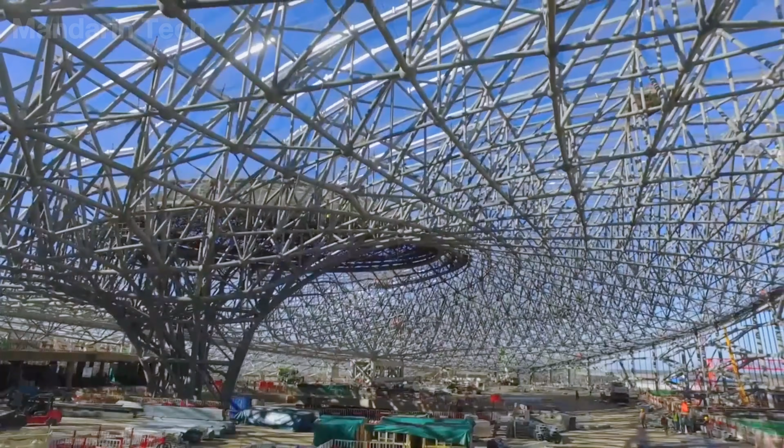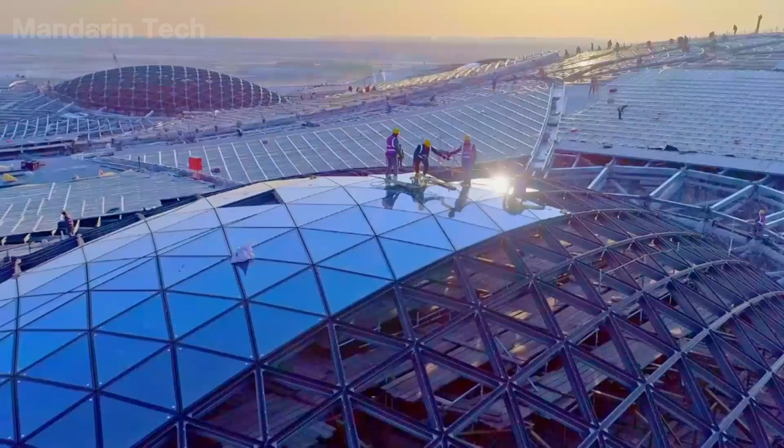Building big is difficult, but building something that is fast, massive, precise, and able to operate reliably for decades is the real challenge. In today's video, join Mandarin Tech as we dive deep into the bold ideas behind Beijing Daxing and how it is reshaping global aviation.

The emergence of Beijing Daxing International Airport was not merely an ambitious choice, but an inevitable consequence of infrastructure pressure in China's capital. For many years, Beijing Capital International Airport, the nation's primary aviation gateway, had been operating well beyond its design capacity. Despite being expanded at a cost of billions of US dollars ahead of the Summer Olympics, the airport once again reached its capacity ceiling after only a few years.

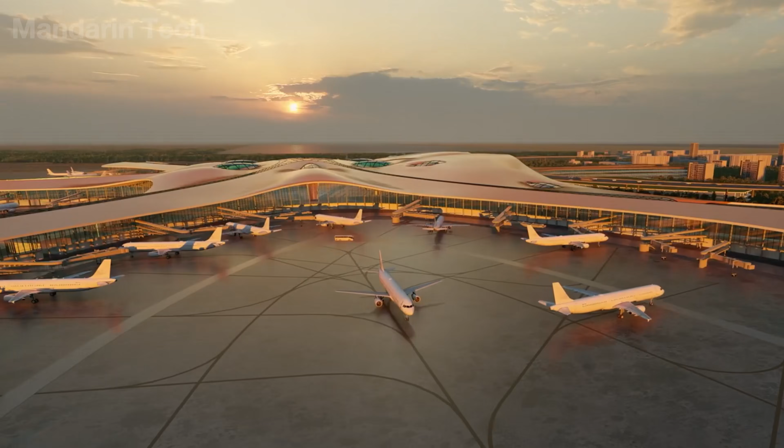When annual passenger traffic surpassed the 100 million mark, Beijing faced a critical dilemma. Without the construction of a new aviation hub, this congestion would constrain economic growth, disrupt national transportation networks, and directly undermine the political role of the capital. In this context, Daxing was planned as a strategic pressure release valve, not only to relieve the existing airport, but also to ensure that Beijing could continue to function smoothly for decades to come.

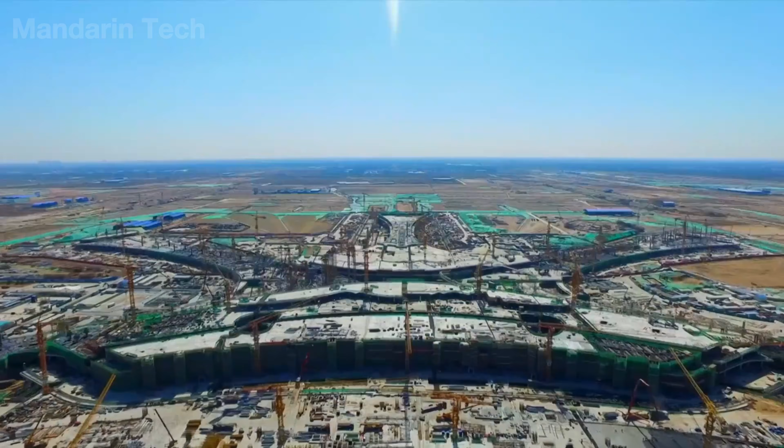To bring this goal to life, Chinese architects and engineers, together with international teams, went through a design process that lasted many years, during which more than 200,000 technical drawings were drafted and refined. The subsequent construction phase then proceeded continuously for 54 months, mobilizing hundreds of thousands of workers and transforming an empty site into one of the largest aviation hubs ever built.

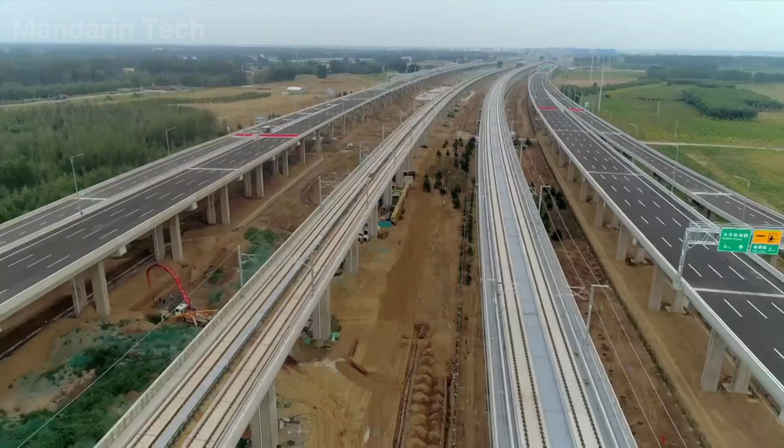Located approximately 46 kilometers south of central Beijing, in an area bordering Hebei province, Beijing Daxing International Airport was planned from the outset according to the standards and structural logic of a new generation airport. The entire airport covers an area of more than 45 square kilometers, large enough to integrate runways, terminal buildings, technical zones, logistics facilities, and safety buffer areas within a single unified site. The central terminal has a total floor area of approximately 700,000 square meters, organized as a continuous space rather than separated blocks, in order to minimize internal walking distances.

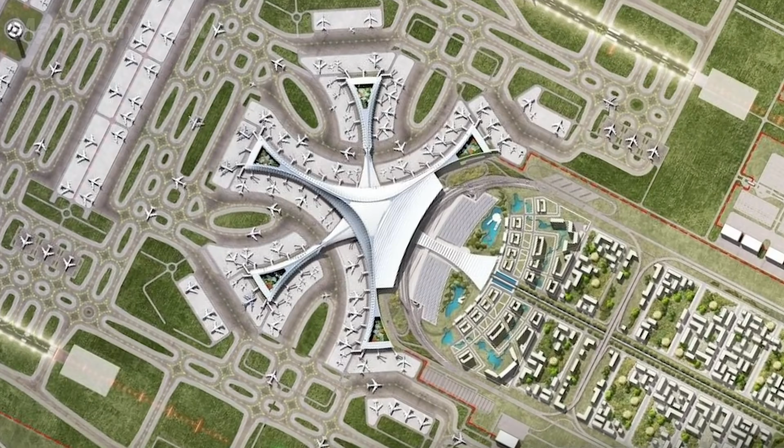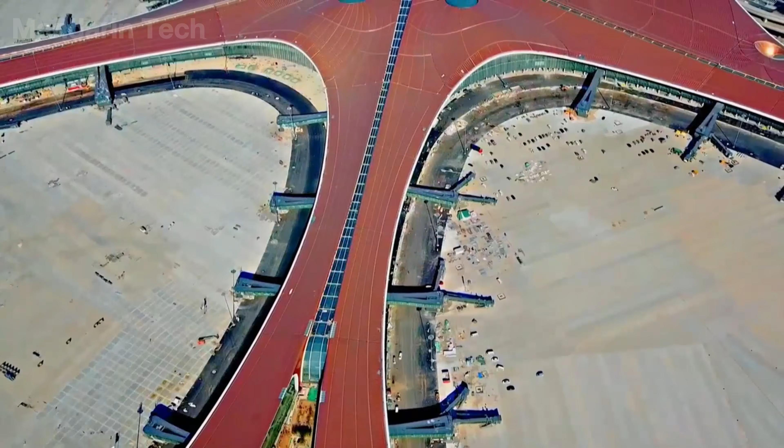At full operational capacity, the airport is configured with 6 parallel runways, enabling the simultaneous handling of multiple takeoff and landing flows at high density. These figures reflect not only sheer scale, but also demonstrate how China approaches an airport as a complete infrastructure ecosystem, rather than as a standalone transportation facility.

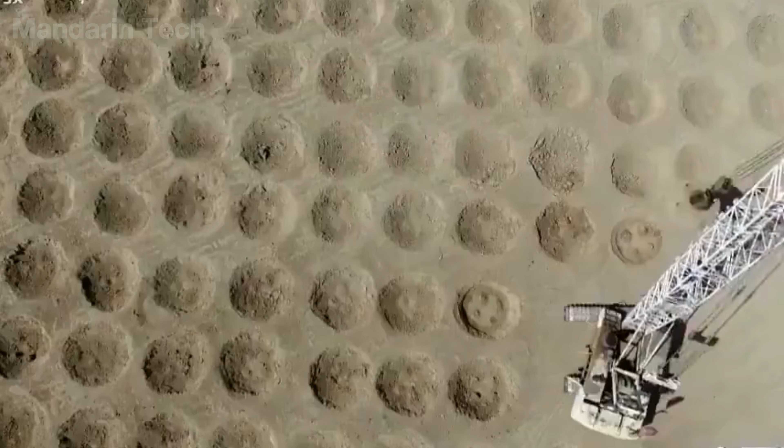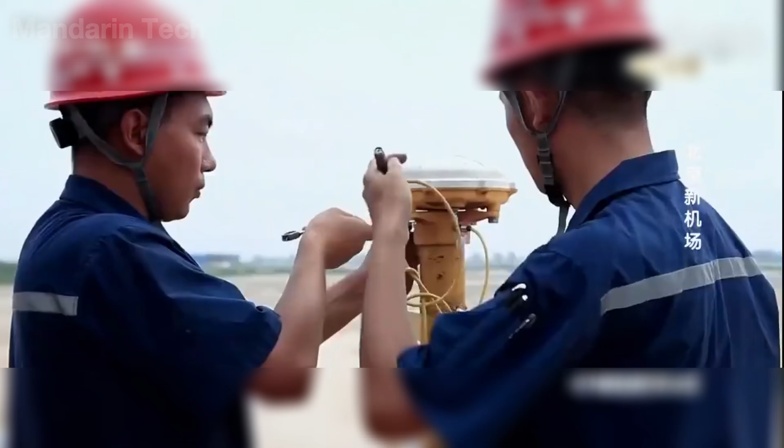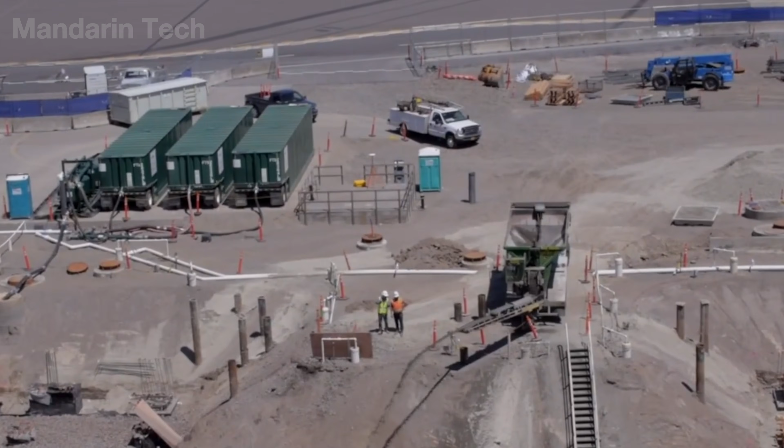Foundation construction is a quiet yet decisive phase of the entire project. Across a site spanning dozens of square kilometers, the construction area was divided into multiple zones to allow parallel operations, ranging from weak soil treatment to elevation leveling. Heavy machinery operated continuously, combined with GPS surveying technology and sensors to precisely control each foundation layer. The site was subdivided into numerous control points to monitor settlement and compaction in real time.

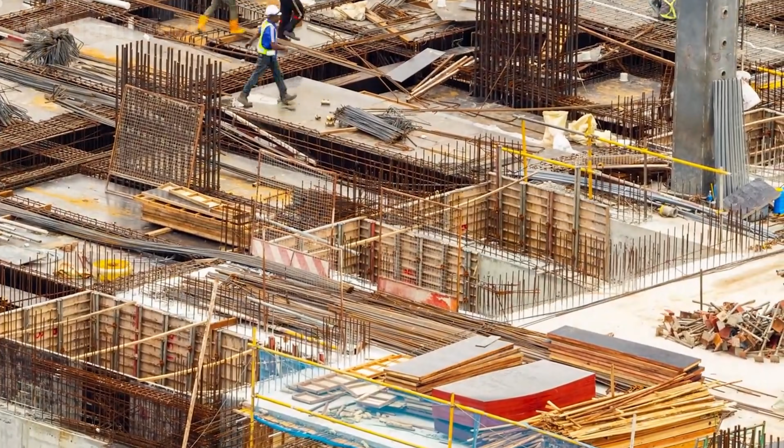At peak periods, tens of thousands of workers were engaged simultaneously, gradually completing the project's technical foundation. It was this rigorous control from the foundation stage that ensured the entire superstructure above could be executed in a stable, coordinated, and durable manner throughout its operational lifespan.

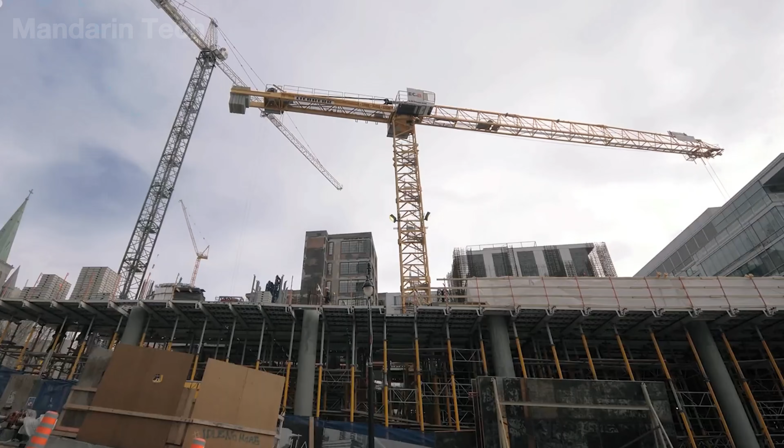Beyond its sheer scale, Beijing Daxing Airport is also shaped by a design philosophy intended to leave a strong first impression, while at the same time solving the challenge of moving tens to hundreds of millions of passengers smoothly each year. To address this problem, Chinese architects and engineers turned to a classic precedent in the history of urban transportation, Grand Central Terminal in New York.

More than a century ago, this station handled hundreds of thousands of people every day, not through dense signage or forced control, but through intelligent spatial organization. A vast central hall, unobstructed sightlines, ramps instead of stairs, and clearly layered circulation flows. As a result, people could intuitively find their way without complex guidance.

Beijing Daxing does not replicate the form of Grand Central, but inherits this core idea and applies it to an aviation-scale context. Instead of lining up dozens of departure gates along long corridors, the terminal is organized around a central core from which 5 finger-like concourses extend outward. This layout shortens the distance from the center to the farthest gate to about 600 meters, creating a continuous, orderly, and efficient flow of movement for millions of passengers each year.

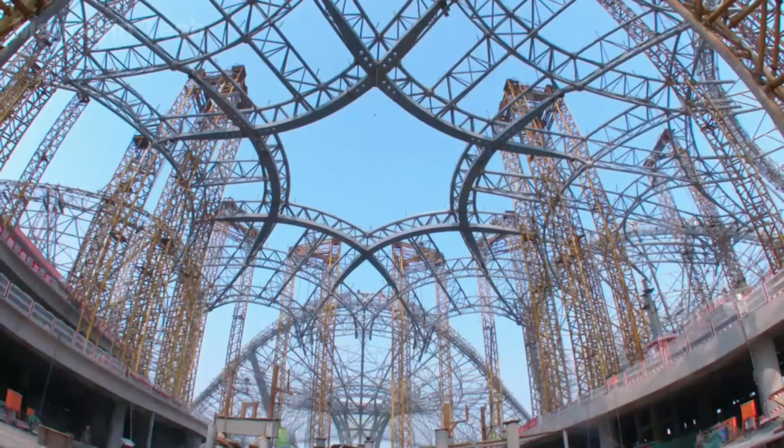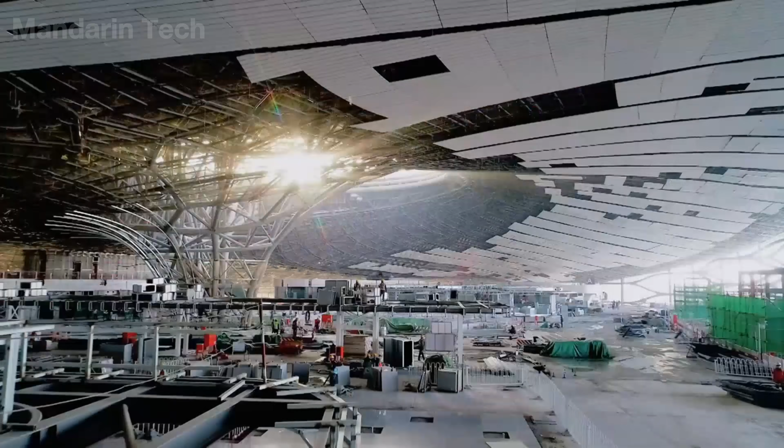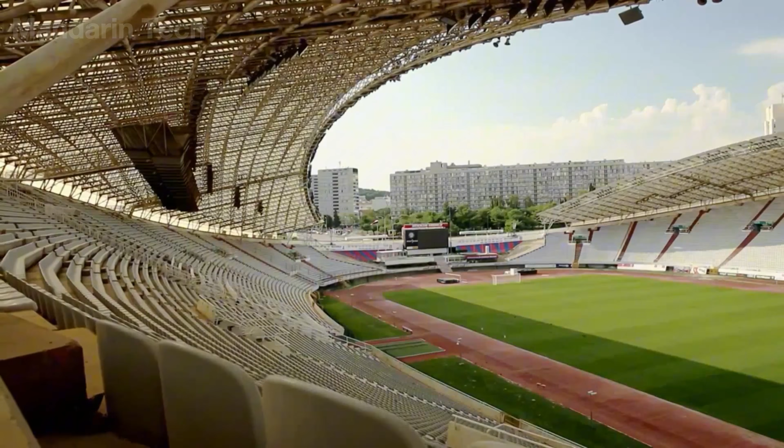The next challenge was to cover an enormous space while maintaining visual and spatial continuity. The ambition to create a vast roof without supporting columns forced the engineers of Beijing Daxing to seek solutions beyond conventional structural systems. Instead of starting with entirely new technologies, they looked to Poljud Stadium, a structure built in 1979, where a three-dimensional space frame had been used to cover the entire grandstand without obstructing sightlines.

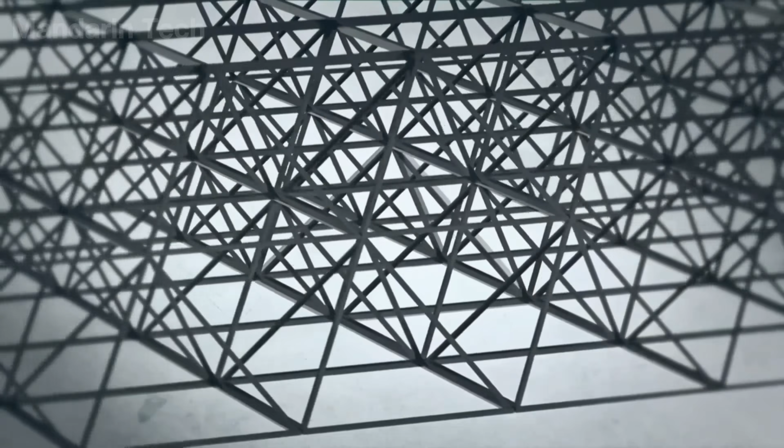Steel members were connected into triangular modules, allowing loads to be distributed in multiple directions, increasing structural stability while reducing material use. This principle became the conceptual foundation for the roof design of Beijing Daxing.

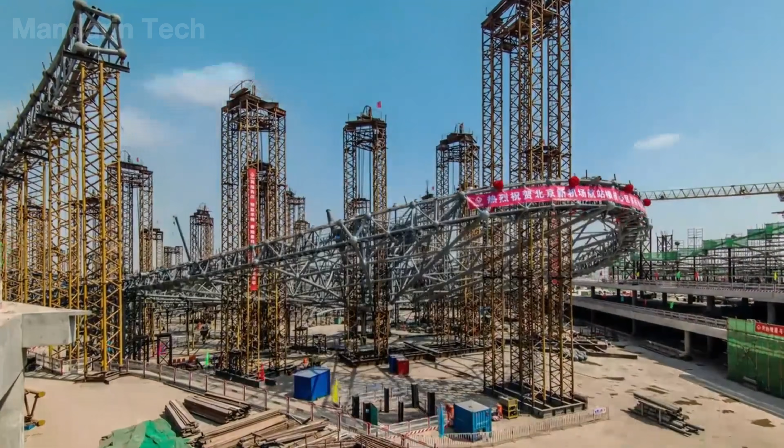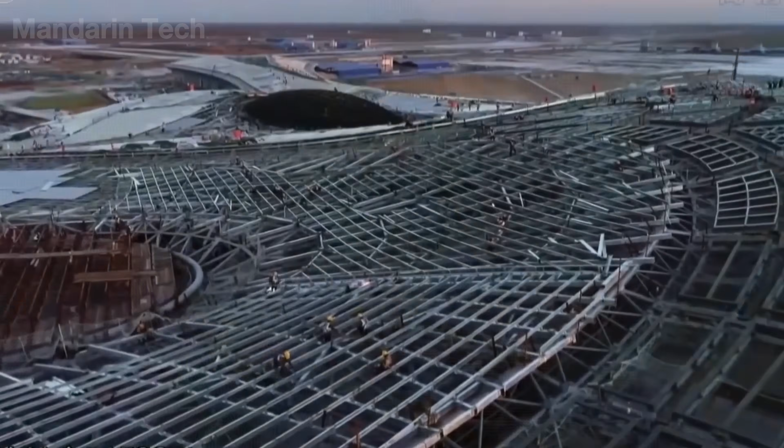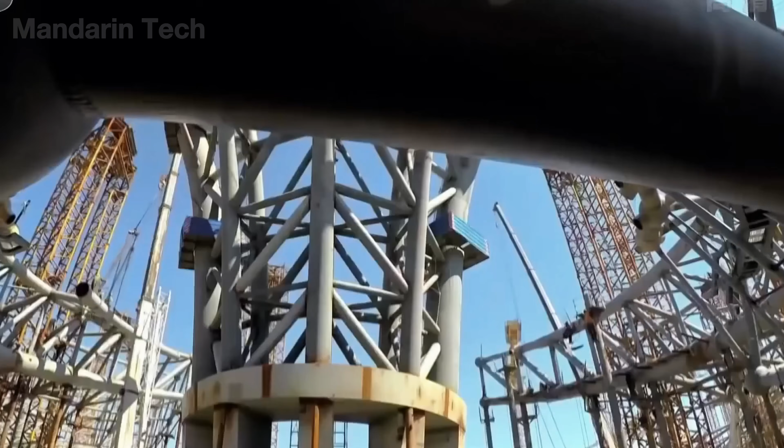Turning Daxing's massive space frame roof into reality presented a construction challenge on an unprecedented scale. Rather than assembling the entire roof at height, a method involving significant risk and difficult-to-control tolerances, the engineers adopted a segmented construction strategy. First, 8 primary load-bearing columns, which together form the entire support system of the roof, were erected with absolute precision. These columns serve as the only anchoring points carrying the full load of the steel roof above.

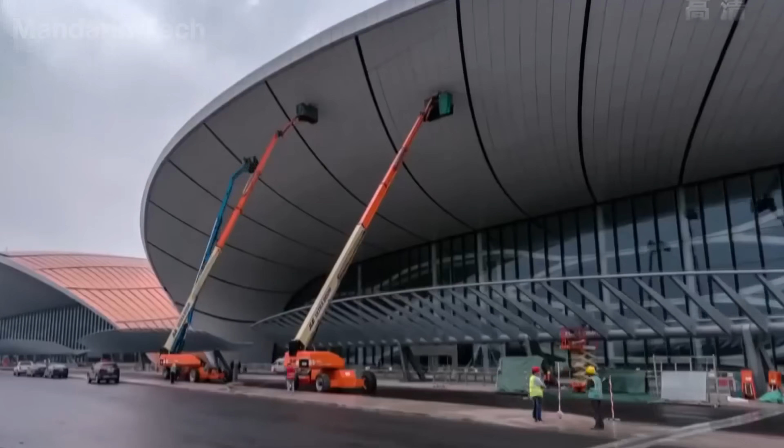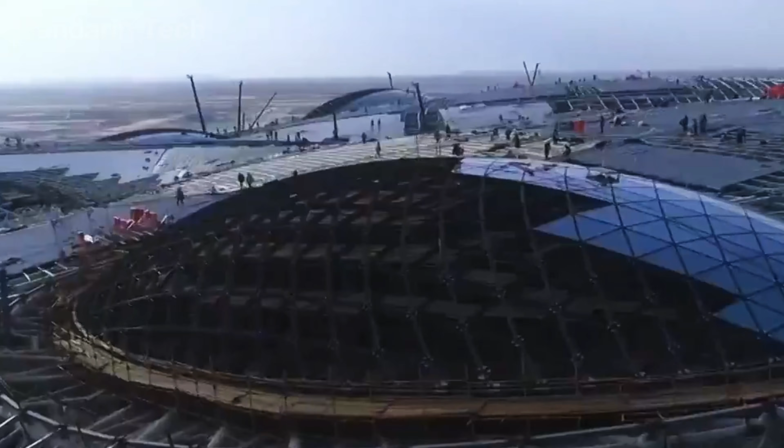Instead of assembling the entire roof structure at height, the construction process was carried out progressively from the ground upward under strict control. Roof components and cladding panels were prefabricated on the ground, then lifted into place using aerial work platforms, cranes, and specialized equipment. At elevation, workers operated directly along the roof edges to align and secure each metal and curved glass panel according to the precise geometry of the design. Installation proceeded sequentially in strips, ensuring accuracy while significantly reducing safety risks.

When completed, the roof, weighing more than 57,000 tons, resembles a floating steel forest suspended above the terminal. Beneath it lies an acoustic ceiling for noise reduction, while above are more than 8,000 daylighting glass panels and 40,000 aluminum cladding panels forming the exterior surface. Just 111 days before operations began, the entire roof envelope was fully installed, marking one of the most impressive construction milestones of the project.

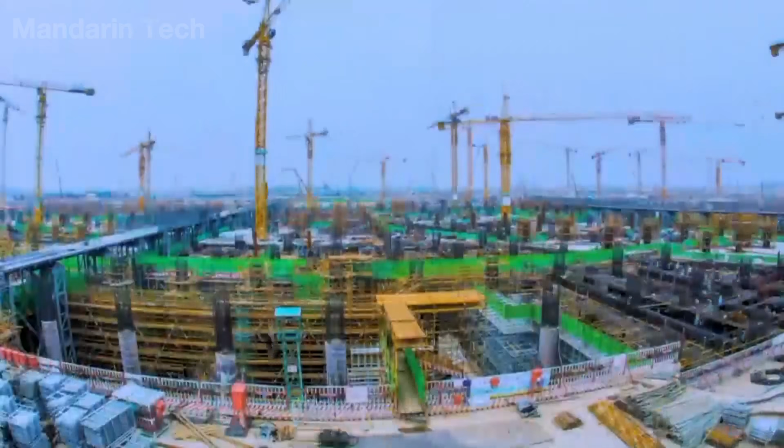Although the planning process lasted many years, Beijing Daxing International Airport was completed in a record time of 4 years and 9 months. Before its opening, the airport entered a large-scale operational trial phase with more than 51,000 volunteers simulating real passenger flows. The results showed that travel time from the central hub to the farthest gate was under 8 minutes, exceeding initial expectations. In parallel, the technical systems were comprehensively reviewed. 7,100 intelligent LED lights were tested. Emergency scenarios were rigorously rehearsed, and nearly 20 kilometers of underground technical tunnels were put into trial operation to ensure stable infrastructure before the airport officially opened.

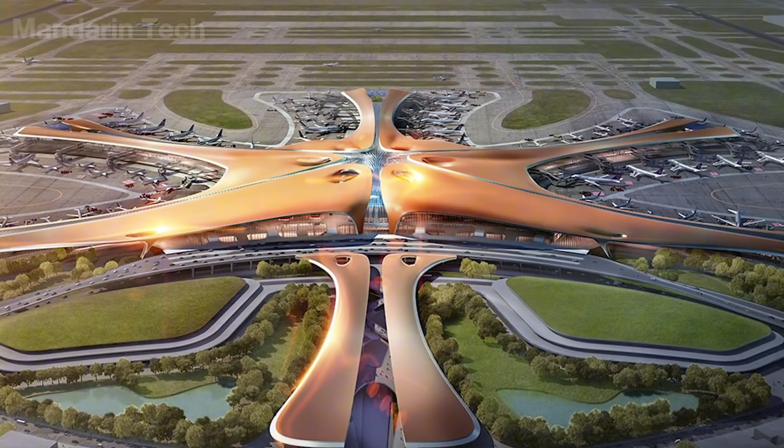Daxing goes far beyond the role of a conventional airport. The project demonstrates that limits once considered impossible in construction can be overcome through technology, organization, and determination. At the same time, it has become a powerful engine of economic development for the entire Beijing-Tianjin-Hebei corridor. The image of Daxing's massive starfish-shaped terminal has spread across international media, telling a story of modernity, innovation, and exceptional capability.

On a global scale, Daxing helps reshape the map of international aviation hubs. As China stands as one of the world's largest centers of production and consumption, a mega airport capable of stable operation at an extremely large scale has a direct impact on global supply chains. The airport thus functions as both an economic and strategic instrument, influencing trade, high-speed logistics, and China's position in global connectivity in the 21st century.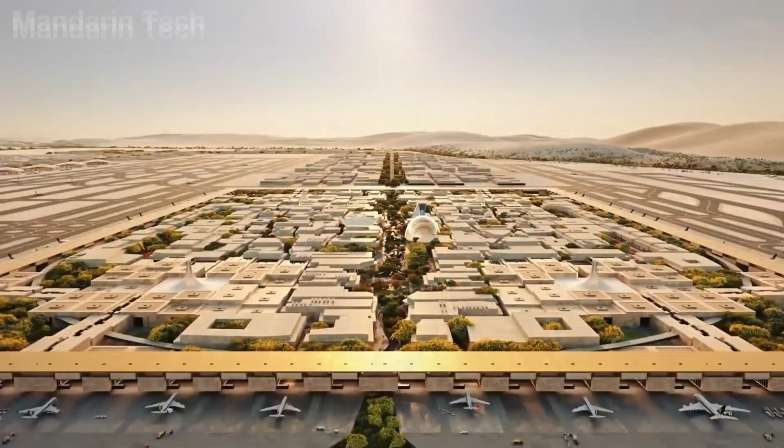From the strategic role of Daxing in reshaping the global aviation network, the next infrastructure story takes us to the Middle East, where King Fahd Airport was built in a very different context, yet reflects an equally ambitious vision of scale and connectivity. King Fahd International Airport is considered one of the most exceptional aviation infrastructure complexes in the world, not because of traffic density, but because of its unprecedented scale and planning mindset.

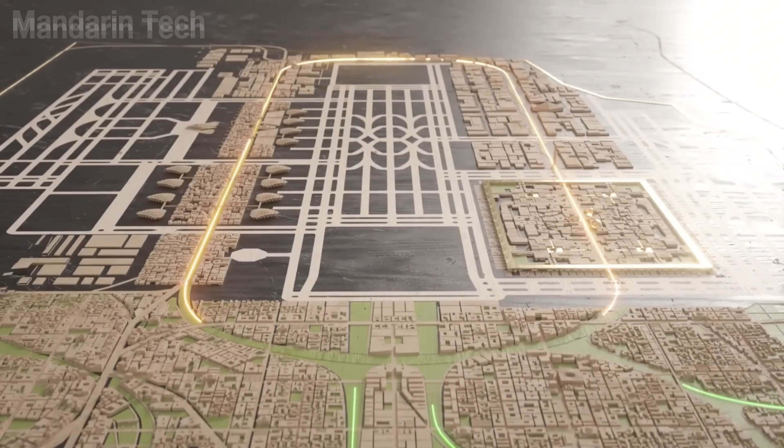With an area of more than 776 square kilometers, larger than many mid-sized cities, King Fahd was designed as an aviation mega-campus in the middle of the Dammam Desert, where every zone, from the passenger terminal, cargo area, and maintenance center, to the dedicated aviation facilities of Saudi Aramco Aviation, operates as an independent unit, yet remains tightly interconnected.

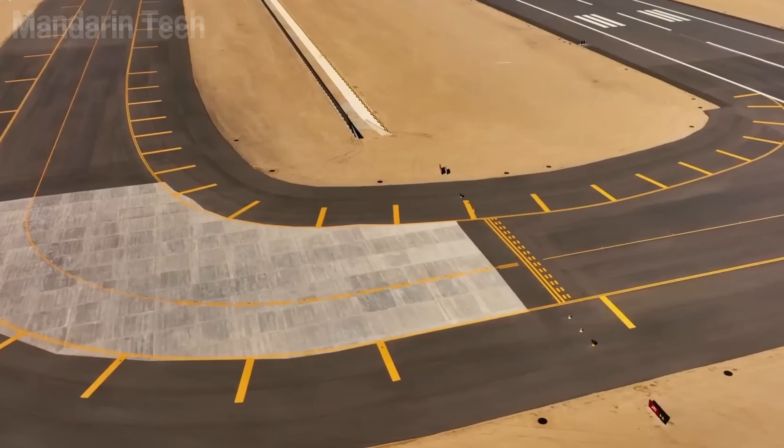Two parallel runways, each more than 13,100 feet long, enable stable handling of long-haul flights, while the expansive taxiway system minimizes intersections and enhances operational safety.

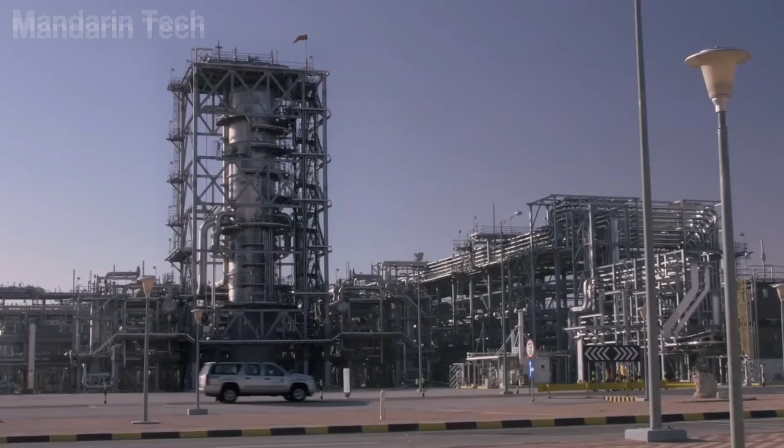From a strategic perspective, King Fahd is a clear testament to Saudi Arabia's effort to shift its economy away from dependence on oil, moving toward a model based on aviation, logistics, and commercial services. The project is positioned as a key piece of infrastructure for the entire Eastern Arabia region, connecting Dammam, Al-Khobar, Dhahran with the rest of the region and the world.

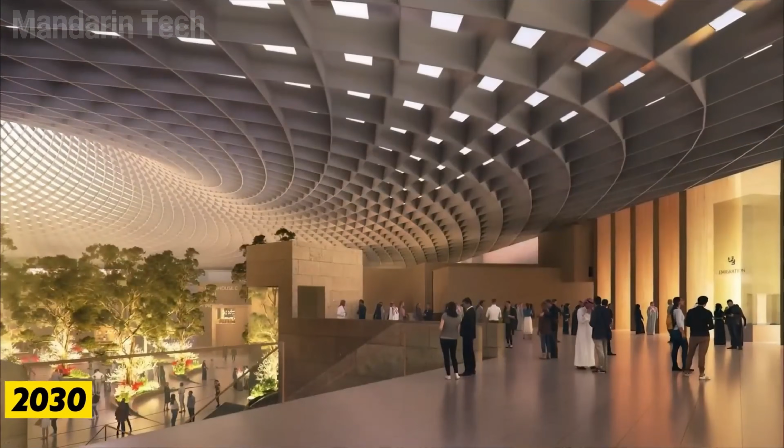Thanks to its strategic location and massive land area, King Fahd is viewed as a core infrastructure asset that helps Eastern Saudi Arabia maintain its development momentum, while strengthening the country's position as an increasingly important logistics hub in the region.

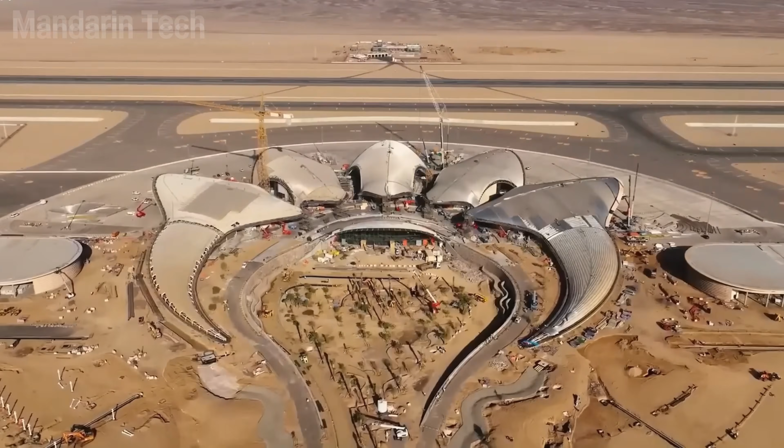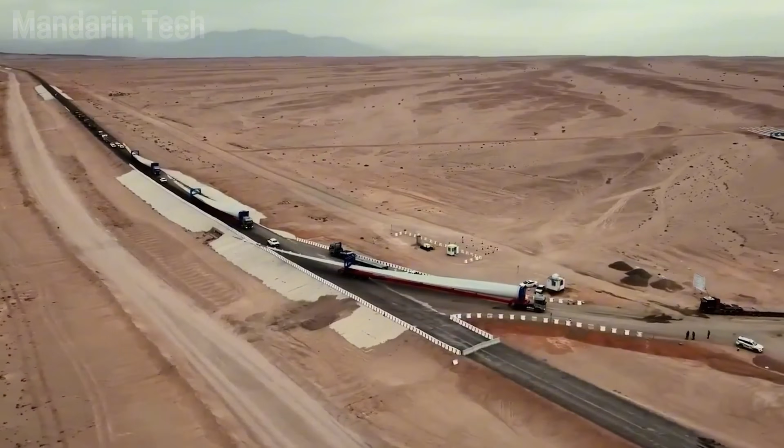The idea of building a large-scale airport in Eastern Saudi Arabia emerged in the late 1970s when air transport demand was rising across the Dammam-Dhahran area. The government chose a vast desert region northwest of Dammam, about 35 kilometers from the city center, because it offered enough land to develop an aviation infrastructure complex for decades to come. The total planned site area reached 776 square kilometers, making King Fahd the airport with the largest land area in the world.

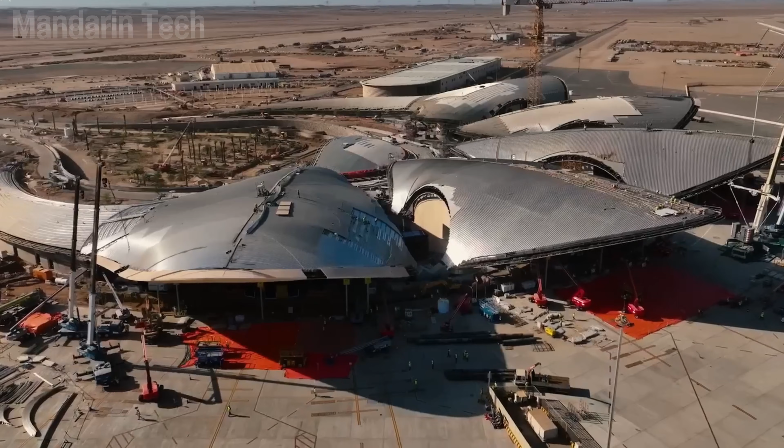In the 1980s, construction teams began leveling the desert to create the foundation for the terminal, runways, and taxiways. The work focused on reshaping the terrain by flattening natural landforms and large sand dunes and reinforcing the surface to support the loads of a modern airport. Because this was a desert region, the biggest challenge was controlling drifting sand and ensuring ground stability before placing structural systems. All activities complied with the standards of the Saudi Arabian General Authority of Civil Aviation, GACA, and the United Nations International Civil Aviation Organization, ICAO, for airport foundations in hot and dry environments.

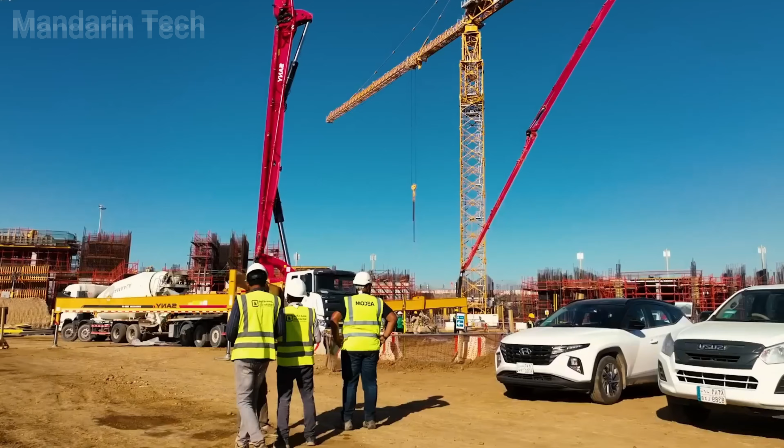King Fahd was designed with two runways, each about 13,100 feet long, enough for wide-body aircraft to take off and land. The construction team laid the base layer of the runway and then covered it with a specialized asphalt concrete capable of withstanding temperatures of more than 120 degrees Fahrenheit in eastern Saudi Arabia. The two runways were built in parallel, allowing the airport to handle multiple flights at the same time and accommodate long-haul aircraft.

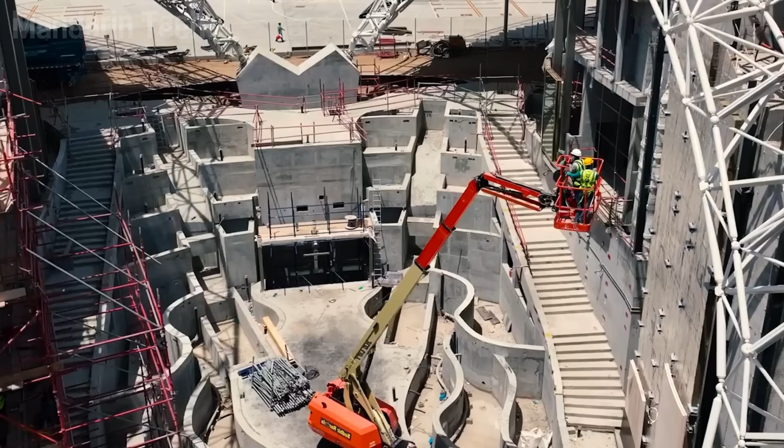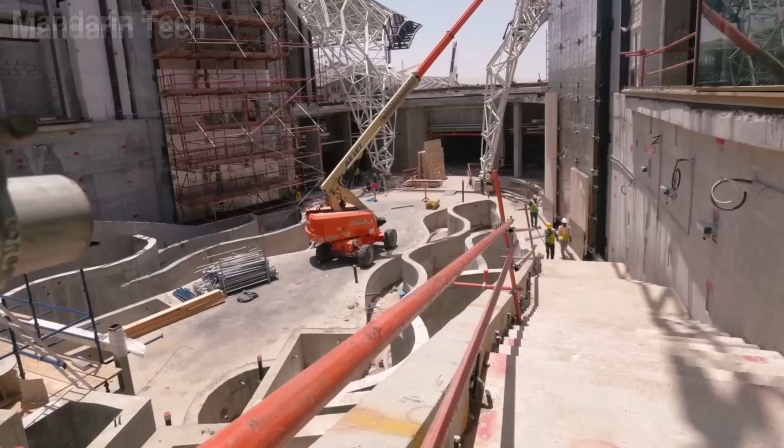From the late 1980s to the early 1990s, the terminal was built with the distinctive architecture of the Gulf region. The project included spacious halls, check-in areas, arrival and departure corridors, and technical facilities. At the same time, the air traffic control tower was constructed to oversee all flight movements across the airport's vast area. Supporting facilities such as the Royal Terminal and a dedicated terminal for Saudi Aramco Aviation were also built according to specialized operational standards.

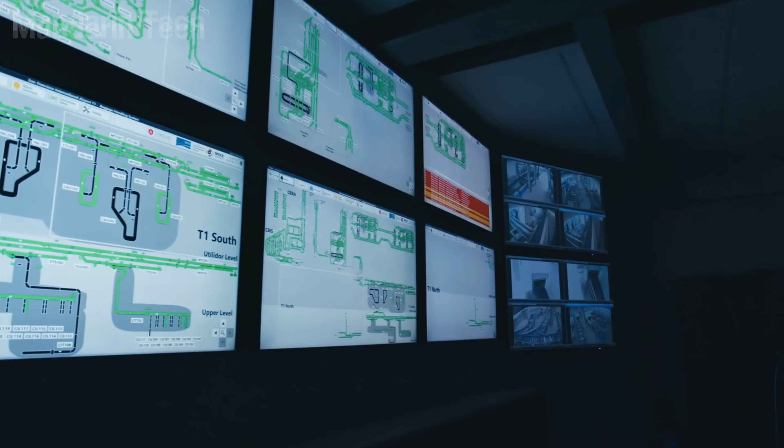Once the main structures were in place, the electrical system, runway lighting, large-capacity air conditioning, ventilation, water supply, drainage, and aviation telecommunications were completed. All aviation equipment, such as radar, navigation systems, radio communications, and baggage handling were integrated according to international standards. GACA and international contractors worked together to ensure that the airport could operate under high temperatures and the harsh desert environment.

By 1990, most of the airport's infrastructure had been completed. Highways were expanded to connect King Fahd with Dammam, Al-Khobar, and Dhahran, turning the airport into an important transportation hub for the eastern region. Supporting areas such as aircraft parking stands, cargo warehouses, maintenance centers, and auxiliary services continued to be added throughout the 1990s. The airport officially opened on November 28, 1999, and has since become the largest aviation gateway on the eastern coast of Saudi Arabia, serving more than 10 million passengers each year.